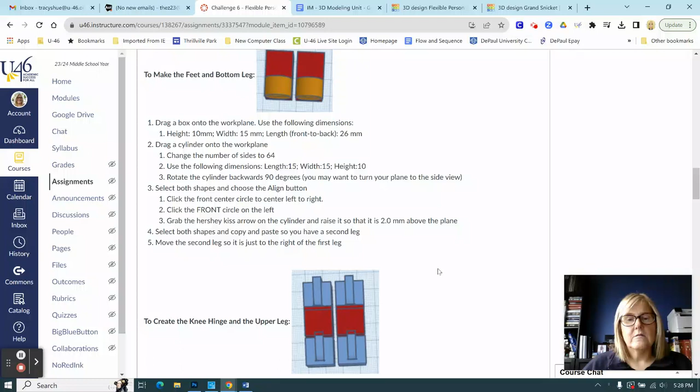Okay, this is the second video of the flexible person where I'm going to show you how to make the feet and the bottom part of the legs, then the knees, the upper part of the legs, and then the hinges at the top of the legs that'll attach to the body. So we're going to do all that in this video.

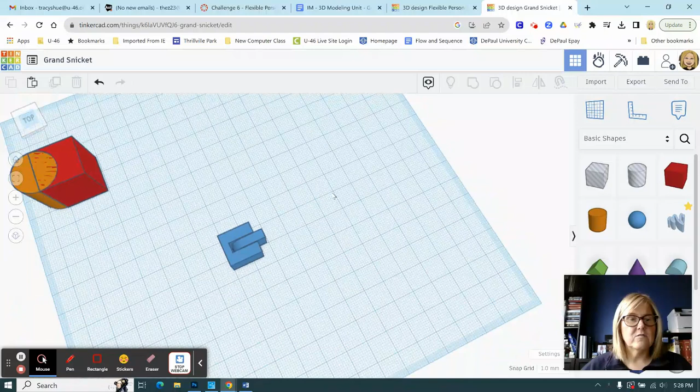So we're going to start by dragging a box onto the work plane and change the dimensions. Let me go back to my build and zoom out a little bit. I'm going to move my hinge over to the side, click the home button on the top left to center the page, and zoom in a bit. Alright, I'm going to drag a box onto the work plane.

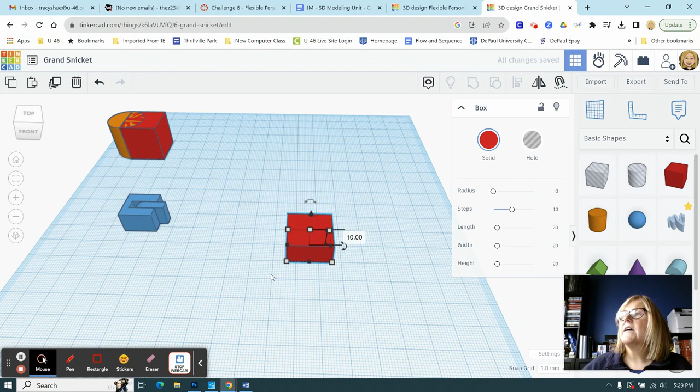I'm going to place it right over here. Let's see, I'm just looking at the side to get my dimensions. The height is going to be 10, and the width, side to side, is going to be 15. So in the front here we're going to make this 15. And then the length is going to be 26, so instead of 20 over here we'll do 26.

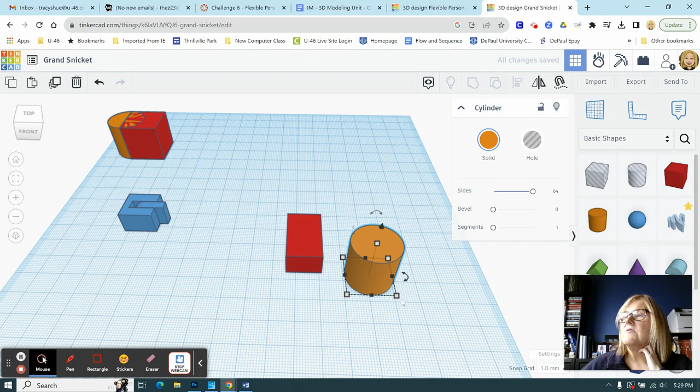Okay, and then we're going to drag a cylinder onto the work plane right here. We're going to change the number of sides to 64 just to smooth it out. We're going to use the following dimensions: the height is going to be 10, just like the red box, and then the length and width are both going to be 15. So we'll do 15 and 15, and enter.

So we're going to rotate the cylinder backwards 90 degrees. By backwards, what I mean is we're going to rotate it this way so it's standing up, almost like the foot is sticking out. You'll see that in the next step.

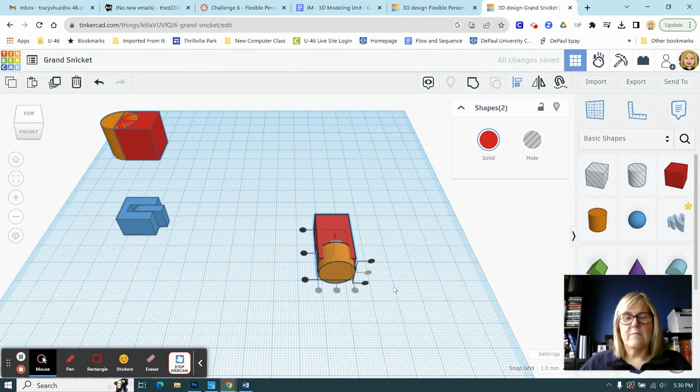I'm going to select both of these shapes and click the Align button in the top right, and choose front center to center these perfectly this way. Then I'm going to grab the Hershey Kiss. I'm going to click off, then click just on the cylinder.

I'm going to drag the Hershey Kiss up so that it's 2 millimeters off of the plane. So right now I'm at -2, -1, 0, +1, 2. Whoops, 2. There we go.

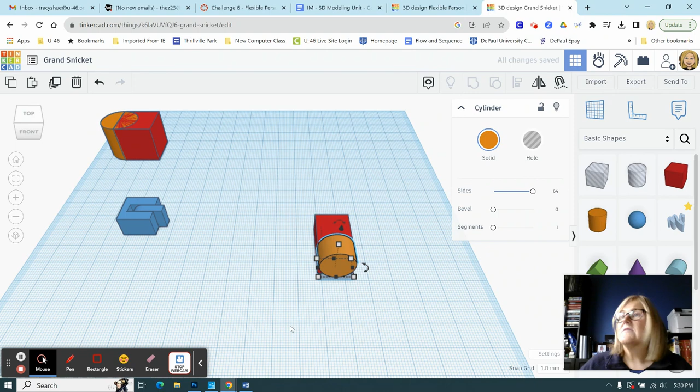I just want to select both shapes, choose align, and take the front center circle. I just want to look to the side and see how that's a little bit off, like the foot is sticking out. I'm going to use my arrow key and move it.

I actually should have done this with aligning - I probably put that in the instructions too, but I should. If I select both of these shapes and click the Align button, I should click this front button right here, and then I know they're both perfect, and in the front there. Okay, so I did that.

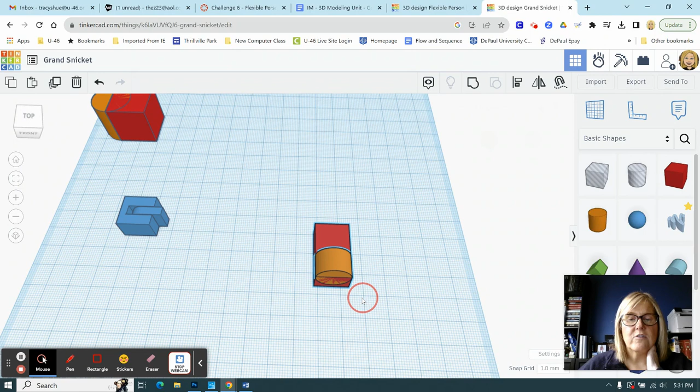I'm going to select both shapes and duplicate or copy and paste so that we have 2 legs. I'm just going to click the duplicate button and use my right arrow key to move it. Oh whoa, that's a little bit too far. Let me zoom in here a little bit. And that's still too far. So I'm just going to have the 2 legs next to each other, maybe somewhere like that, okay?

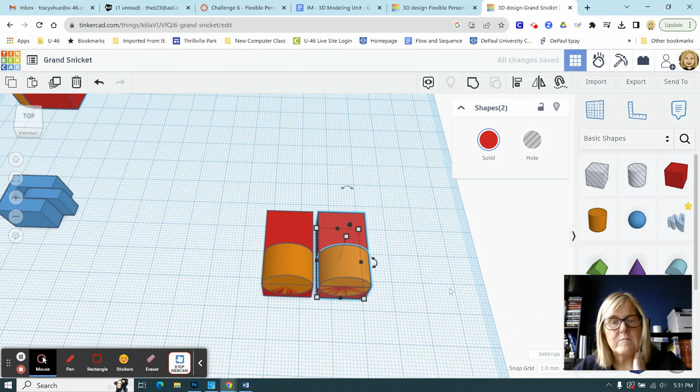Alright, so now we've actually just finished this top part right here. So we're on the part that says to create the knee hinge, the upper leg, and then this hinge up here. Remember we have that hinge kind of sitting off to the side over there.

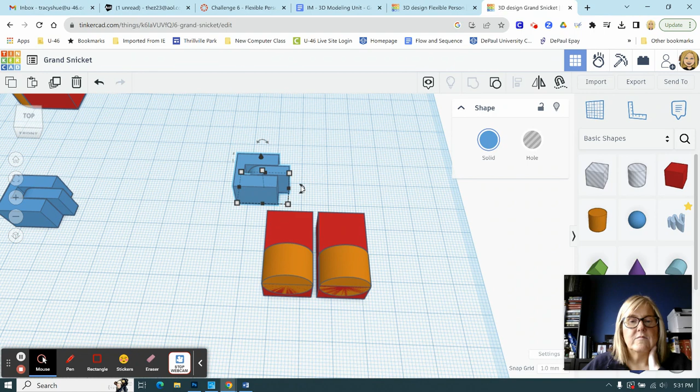I'm going to select that and duplicate it, and drag the duplicate over towards my legs over here. I'm going to rotate it 90 degrees using this rotate circle, rotating it this way, 90 exactly, so that the little knob part faces up.

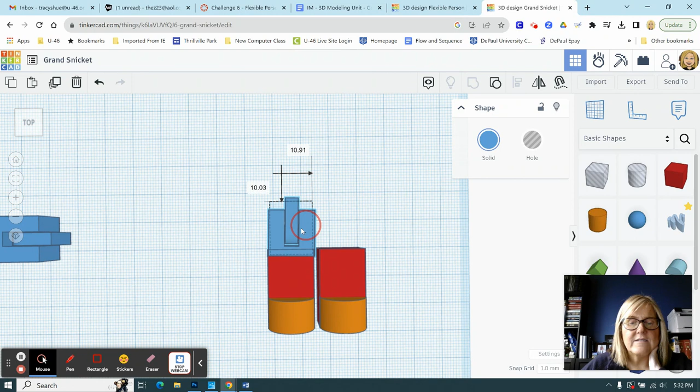Alright, so drag the hinge so it overlaps the leg - you want it to just overlap a little bit. You can kind of see how this blue part is overlapping the red just a little bit. Okay, I duplicated it first. I wanted to just see if I centered it, because I should be centering it. Drag the hinge, duplicate the hinge, move it over the top of the second leg, and duplicate it. Alright, so I think I do all the centering at a later time.

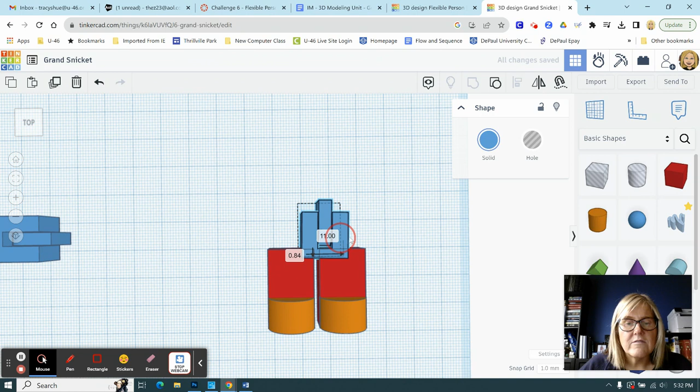Okay, so I'm going to duplicate this part and drag it to the other side. It didn't duplicate, did it? Control Z. Okay, with this selected I'm going to click duplicate, just drag this one over to this side. And again, we just want it to overlap just a little bit.

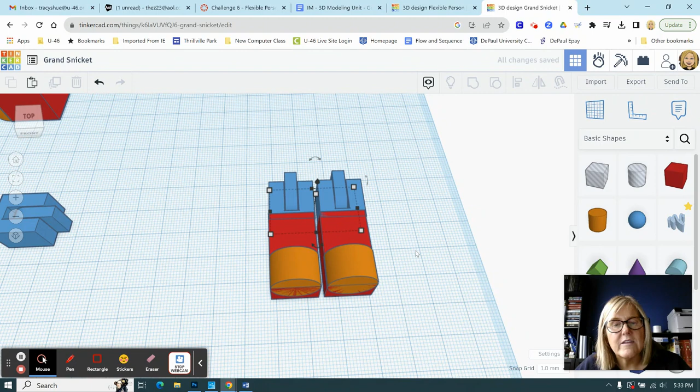I'd like them to be even, so you might want to visually try to even them so they're at the same height, which they don't look like they are. So I'm going to select both of these blue pieces, click the align button, and make sure they are aligned perfectly on the bottom edge. That's not in the instructions, but we should do it anyway because they should be lined up.

Then we are going to select both legs, just the red part, not the feet and the hinges - just these two red things. So I'm just going to hold my mouse and draw a little line between these two red pieces.

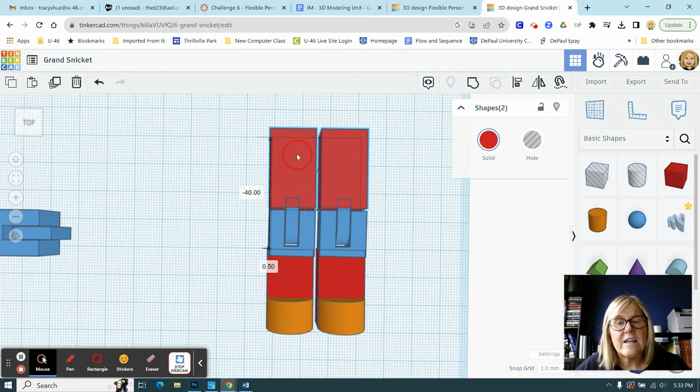I'm going to click the duplicate button, and then drag them so we just want a little gap in here. Again, I'm going to center everything later, so the alignment's going to be a little off. You want to see a little - let me see if we can see it from the side. See how there's a little bit of blue gap in there? You want to have a little bit of gap so that it's bendable. You don't want too much of a gap, because remember what happened to my head, how it got all floppy - that was just too big of a gap. So leave a little bit of a gap there, okay?

So I selected both legs, just the red part, not the feet, and duplicated it. I dragged the duplicate up so there's a very small amount of space between the knee hinge and the upper leg. I'm going to select the red box of both upper legs, and we're going to change the length from 26 to 16. I'll click on this little black square, and instead of 26, type 16, enter, and now that shrinks them down because they were too big.

Now I'm going to select both of these blue hinges, duplicate them, and put them on top. I'll click off so nothing is selected, take my mouse and draw a line through the two hinges, click my duplicate button in the top left, and then drag these up here. As long as you're moving both at the same time, they will both be even, top to bottom. Again, I'm going to center these in a second, so don't worry about them not lining up perfectly with the knee, upper leg, lower leg, and foot. We're going to do that next.

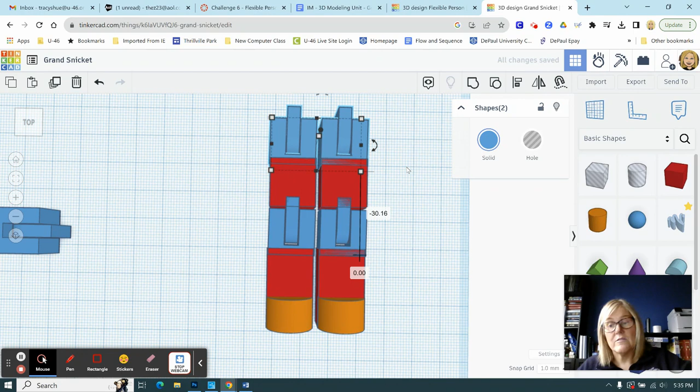I'm going to click off so nothing is selected, and draw a line just through the left leg - don't get any of the right leg, just the left leg so it's all selected. I'll click my alignment button, then click the center button at the bottom. Then I'll click off so nothing is selected, and draw a line through this leg on this side. Once again, I click my alignment button and the center button. That makes sure everything going up and down is aligned perfectly.

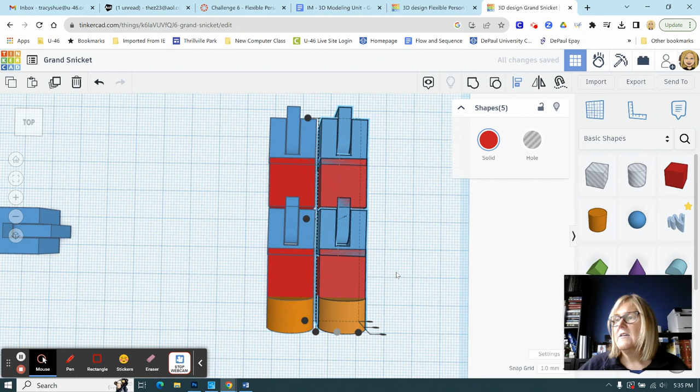Then I'm going to draw a big box around all the legs, every single piece, and group all the legs together. That makes sure all the legs are grouped together. We're not going to use these for a little while - well, we will in a minute - but we need room up here for the body and head. So I'm just going to drag these legs down a little bit to give myself some room.

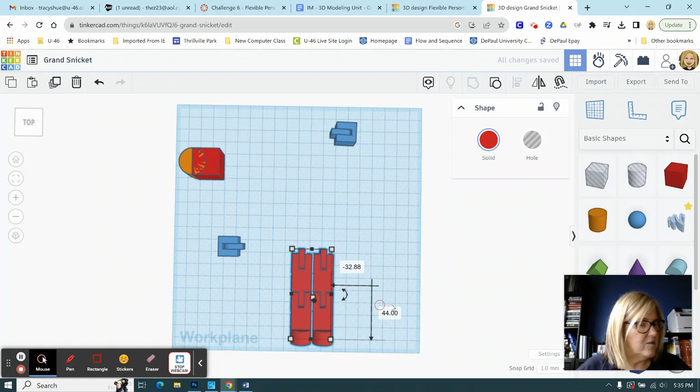And now we're going to do the body part. So that was it for the legs. I'm going to stop this video and start a new video for the body, which will be very short because the body's pretty short. But that was the video for the legs - let me know if you have any questions with that part, okay?